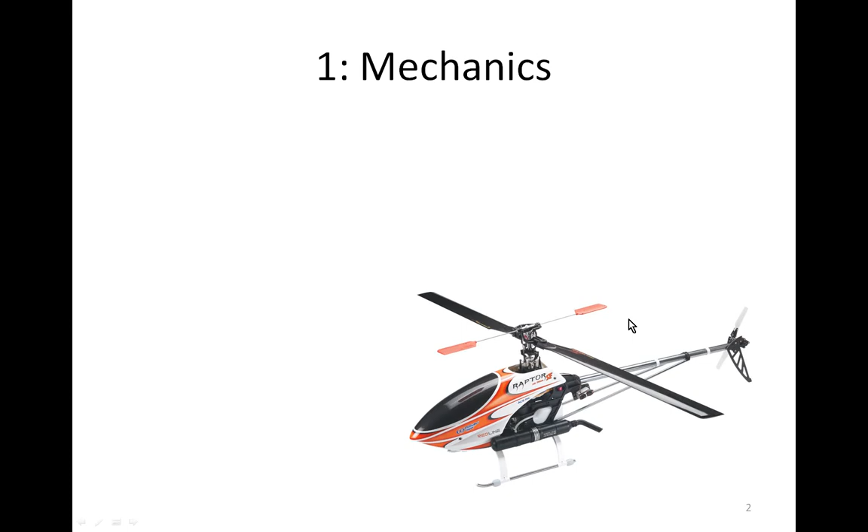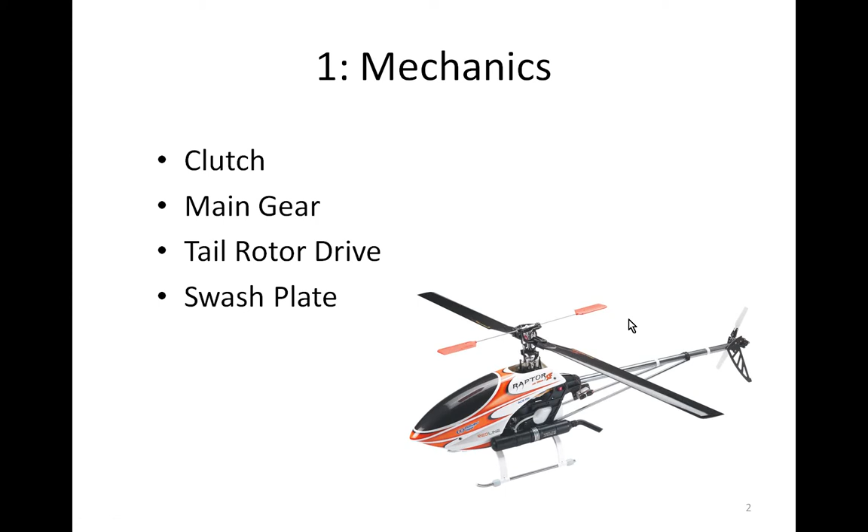First part is about mechanics. We will see the following components: the clutch, the main gear, the tail rotor drive, and the swash plate. The clutch. Here is a side view of an RC Heli. Clutch is here, between the engine, below, and the main gear, here.

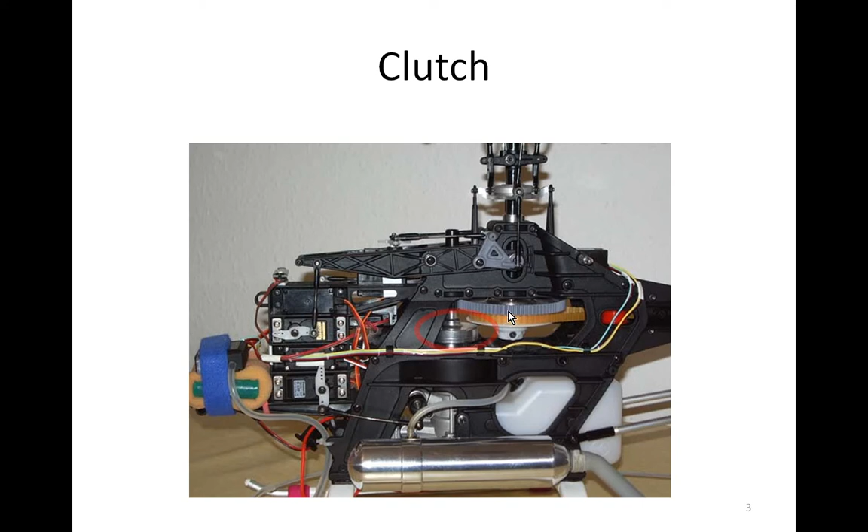The clutch allows to start the engine without driving the rotor. This is a safety component. It's a centrifugal clutch. So, main rotor is driven when engine accelerates, and main rotor is not driven when engine idles. So, we can move the Heli when the engine idles from the starting area to the takeoff area with safety.

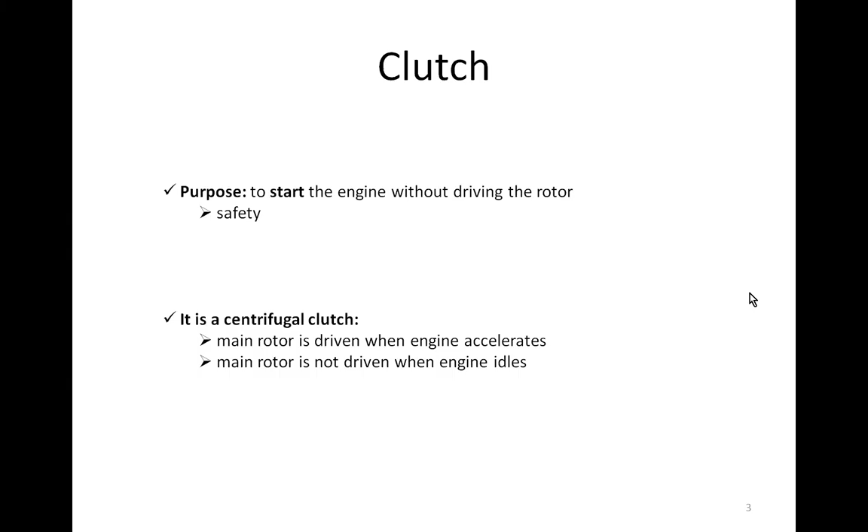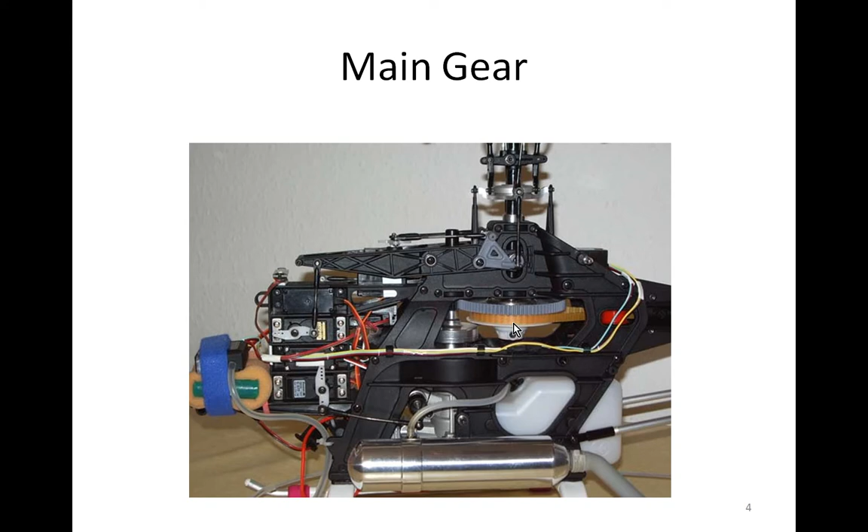One note: electric Helis don't have a clutch because electric motor can be stopped or run with the transmitter. Now the main gear. Main gear is here. This is a gray component here. It drives the main rotor. Below there is another smaller gear which drives the tail rotor.

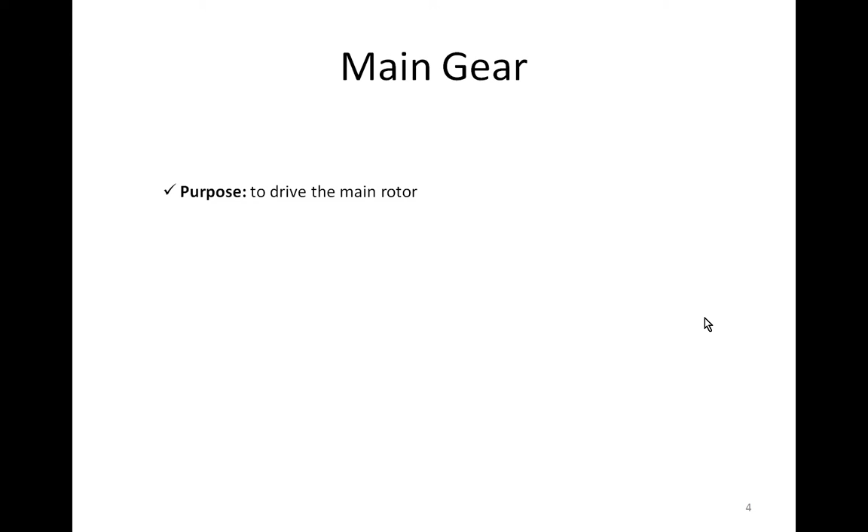Main gear drives the main rotor. A tail drive pulley is mounted just below. This assembly is mounted on a one-way bearing. Then, when the engine runs, it drives the rotor. When the engine idles or stops, the main rotor turns freely.

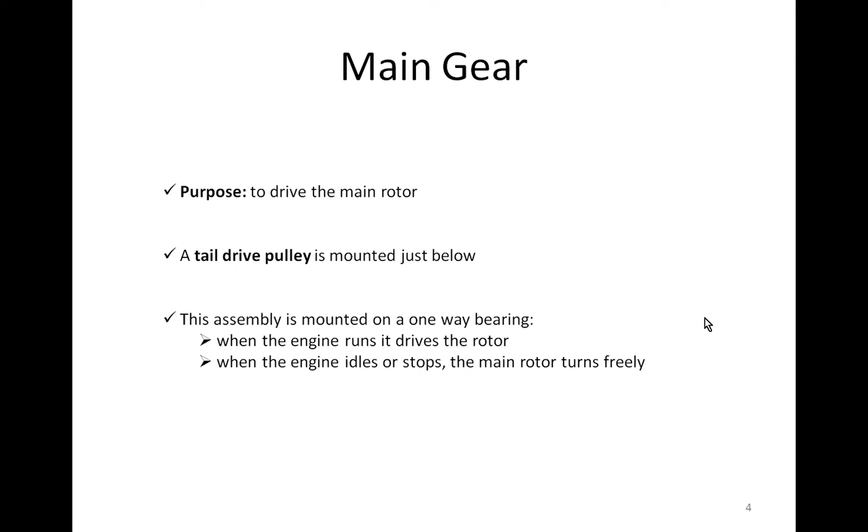It's like a bicycle, for example. When you pedal, you drive the wheel. If we stop pedaling, the wheel continues to turn. This is the same for the main gear.

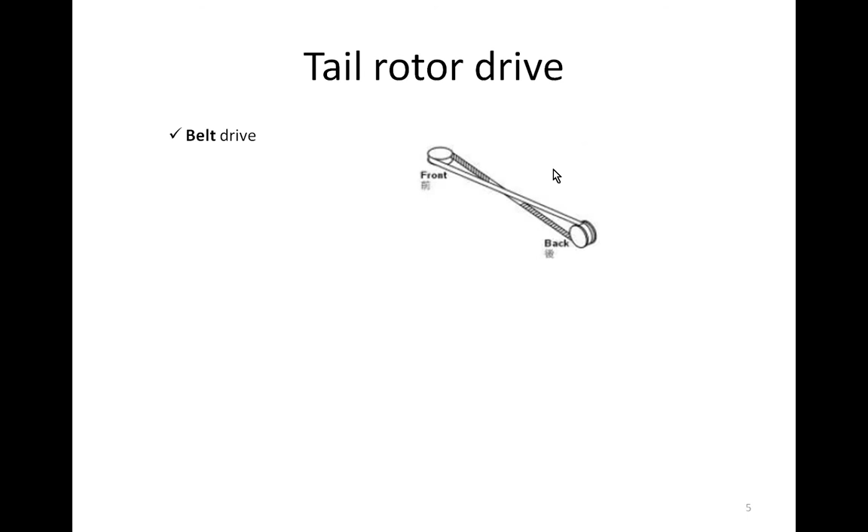Now let's talk about tail rotor drive. There are two ways to drive the tail rotor: the belt drive, where the belt goes through the tail boom, or the torque tube drive. Torque tube is inside the tail boom too. Here is a comparison about the two systems, with advantages and drawbacks for each system.

So, for the belt, advantages are: we have fewer mechanical parts, then it's inexpensive, and we have less damage in case of crash. Drawbacks are: we have a less accurate rudder than with the torque tube, and we need to regularly check the tension of the belt. For the torque tube, the advantages are: we have a precise rudder and we have no maintenance.

Drawbacks are: torque tube is more expensive and it's fragile in case of crash. In green here, it is the most popular system that we find now on the new helicopter kits. This is the torque tube.

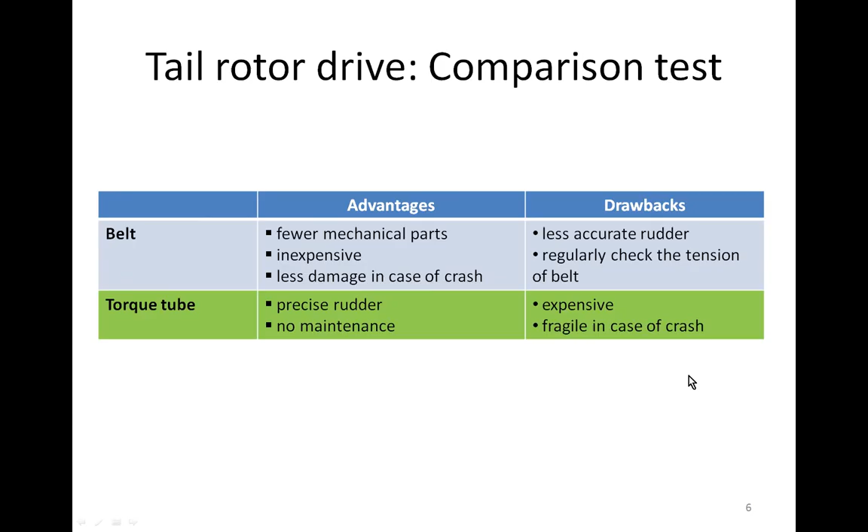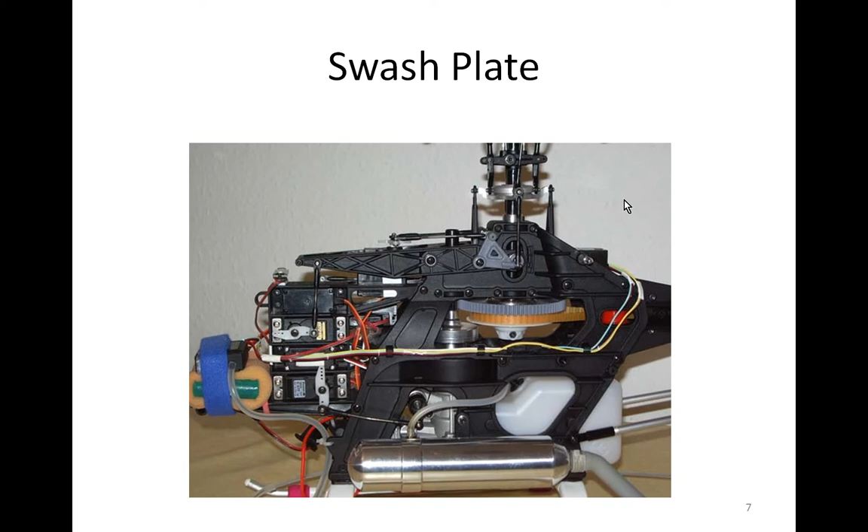The last component we are going to see now is the swash plate. The swash plate is located here. It controls the pitch of the main blades. Swash plate transmits orders to the main rotor. It can move up or down. This is the collective pitch control.

This control makes helicopter move up or down. Or the swash plate can tilt. This is a cyclic pitch control to tilt the helicopter. There are many swash plate types. Swash plate type defines the layout and the number of servos which operate the collective pitch function. Swash plate type may differ according to the model and the manufacturer.

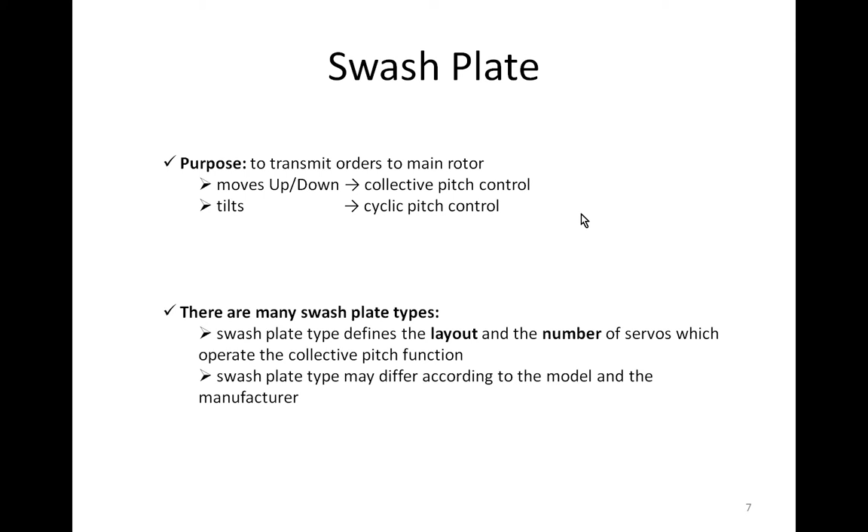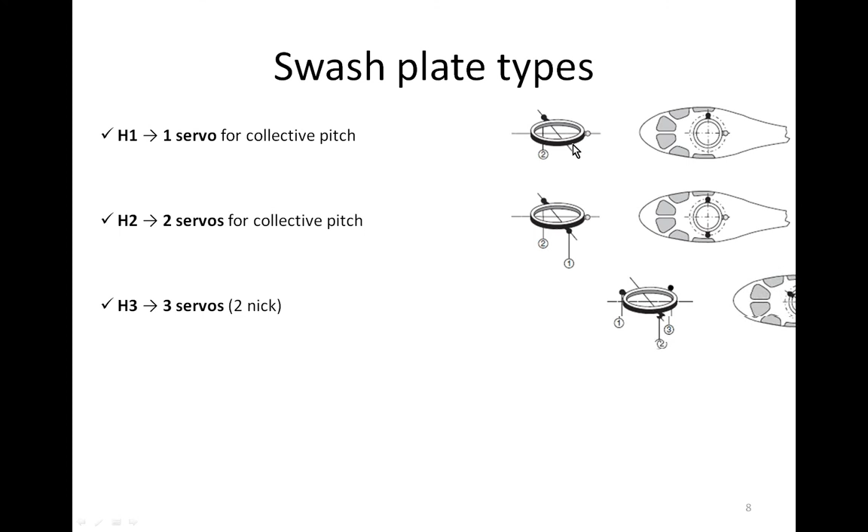Let's see swash plate types. Types are separated by the number of servos used to control the collective pitch. In other words, servos used to move up or down the swash plate. So we will see the different swash plate types. Here is the swash plate, and in black here are locations of servos which control collective pitch.

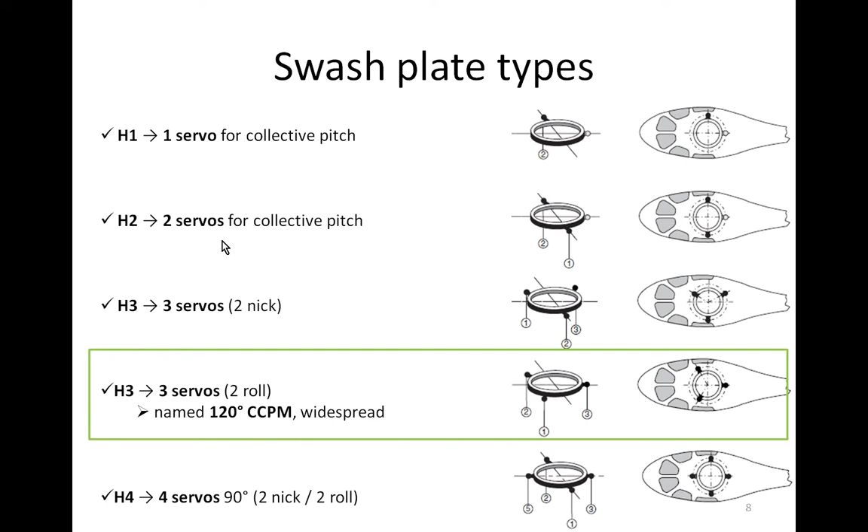The first type is H1 with one servo for collective pitch here. The H2 with two servos for collective pitch here and here. The first H3 with three servos, two on the nick, and another H3 with three servos, two on the roll, and the H4 with four servos at 90 degrees, two on the nick and two on the roll.

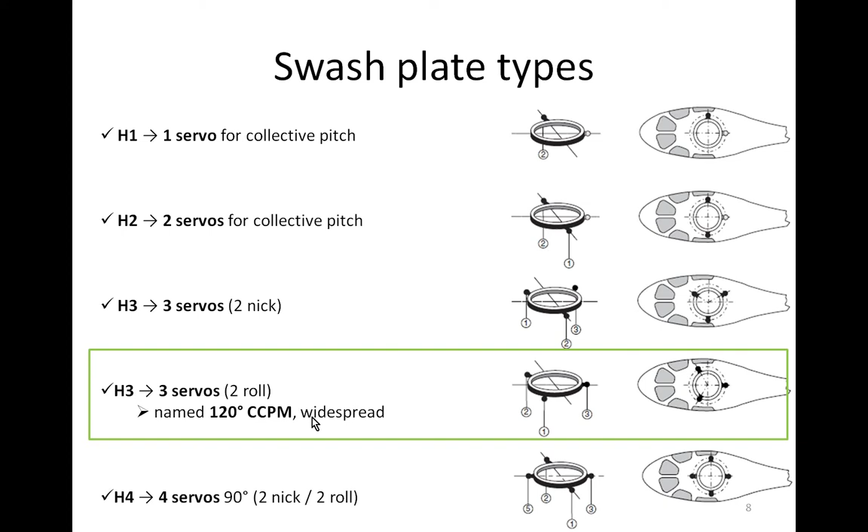Surrounded with green color is the most used swash plate type. This is the H3 with three servos and two on the roll. It is also named 120 degrees CCPM. CCPM means cyclic collective pitch mixing.

Now let's see a comparison test between the different swash plates. Let's start with the H1, one servo for the collective pitch. Advantages of the H1 is we have one servo per function, so setup is simple, and we don't need electronic mixing. In other words, we don't need a specific program in the radio to manage this swash plate.

Drawbacks are: servos have bigger load because servos work alone for each function. Also, if we have one faulty servo, we lose one function. So during the flight, if we lose a servo, we will lose one function: the nick, or the roll, or the pitch. Also, one drawback is mechanical mixing. We need mechanical mixing with this swash plate, so the heli mechanics is more complex.

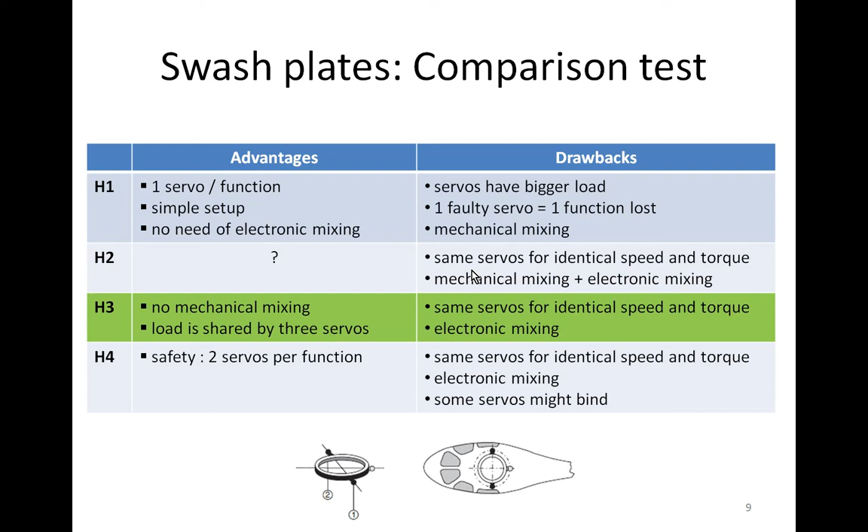Now let's see the H2. I didn't see advantages. For the drawbacks, we need same servos for identical speed and torque, because servos will work together. Also, we need a mechanical mixing plus an electronic mixing. Electronic mixing means we need to have a transmitter capable to manage H2 swash plate.

Now let's see H3 swash plate. Advantages are we don't need mechanical mixing, then the mechanics is simpler, and load is shared by 3 servos because they work together. Drawbacks are we need same servos for identical speed and torque because they work together, and we need an electronic mixing, so we must have a transmitter capable to manage the H3 swash plate.

Now the H4. The advantage for the H4 is the safety, because we have 2 servos per function. So if one servo is broken, we have another servo to manage the function. Drawbacks are we need same servos for identical speed and torque because all servos work together. We need an electronic mixing, so a transmitter with a program to manage the H4 swash plate.

And also the problem with H4 is that some servos might bind, because it is hard to put 4 points in the same plane. H3 is better for this reason: there is always a plane which contains the 3 points. The row in green is the most used swash plate type, H3 CCPM, because we can have a simpler mechanics, no need of a mechanical mixing, and almost all transmitters can manage CCPM swash plate.

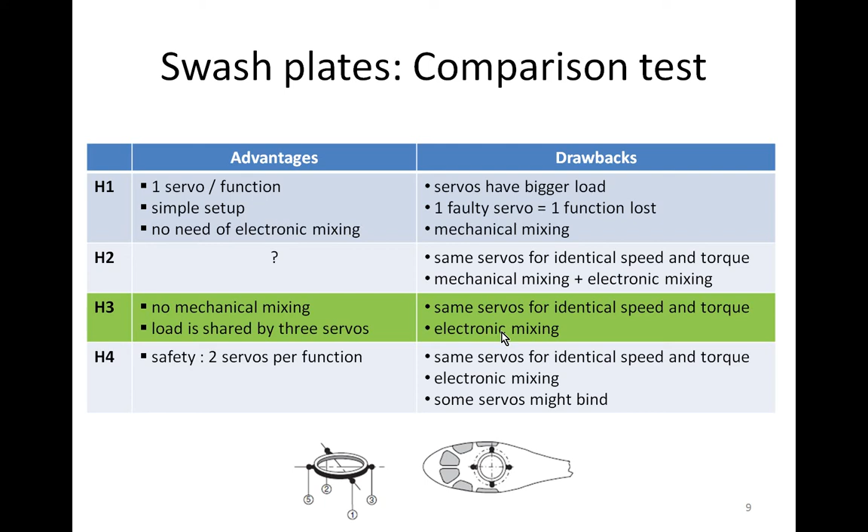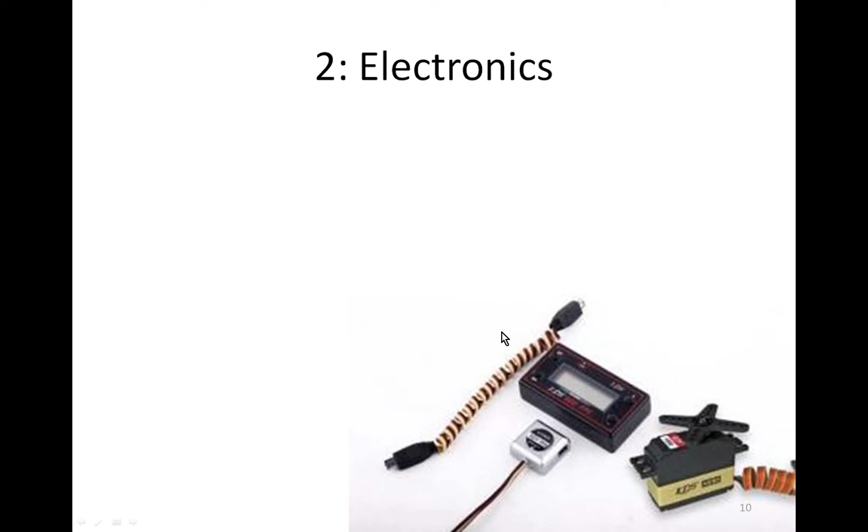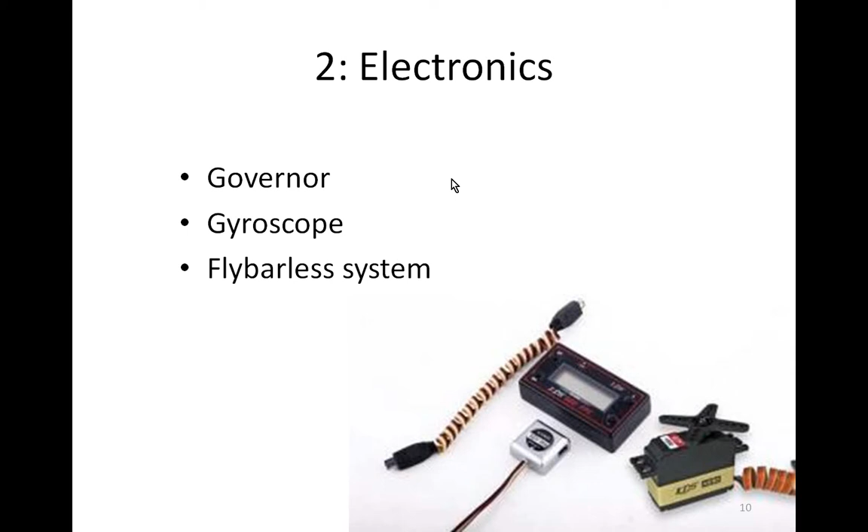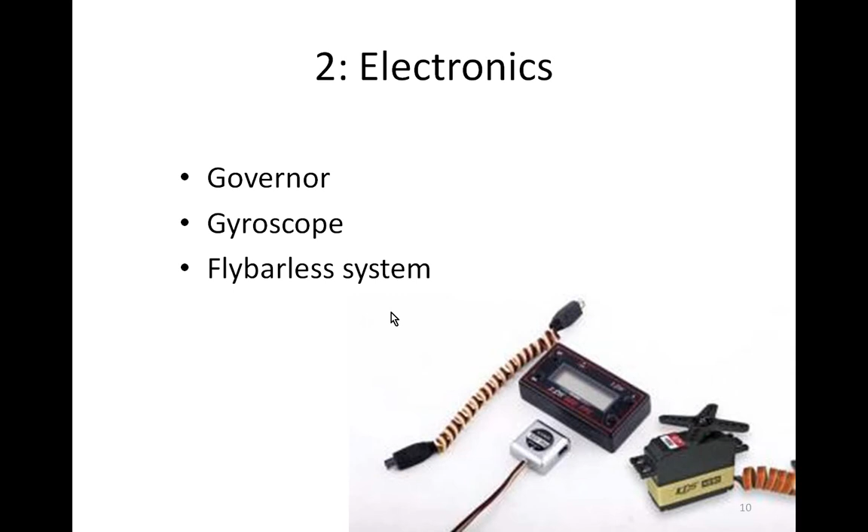Now we are going to talk about RC heli electronics. We will see governor, gyroscope, and flybarless system. Governor is not necessary to fly, but gyroscope is necessary. Flybarless is an evolution for electronic management of the rotor. Let's start with the governor.

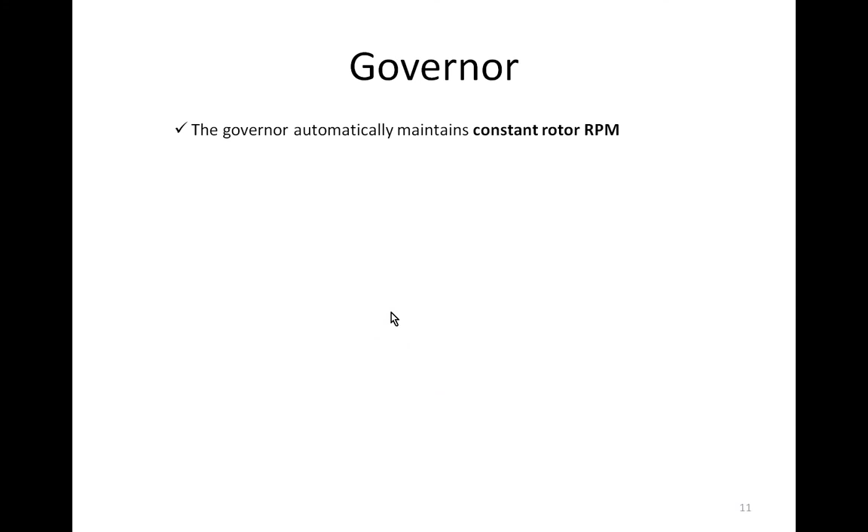When we modify pitch on the blades, load on the rotor changes, and then the rotor speed changes. To avoid this, we can use a governor. The governor will maintain a constant rotor RPM. How does it work? The sensor measures the engine speed, and the governor controls the throttle servo. And on some helis, the governor can also control the mixture.

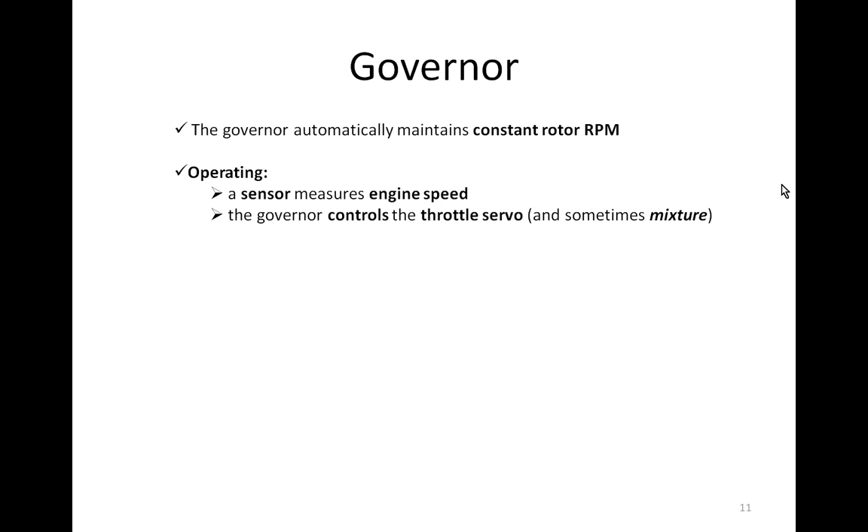For example, the pilot can set a value, for example 2000 RPM for the rotor speed, and also we have the throttle input. This input is to control the throttle servo when the governor is disabled, for example when we start the engine or when we take off the heli.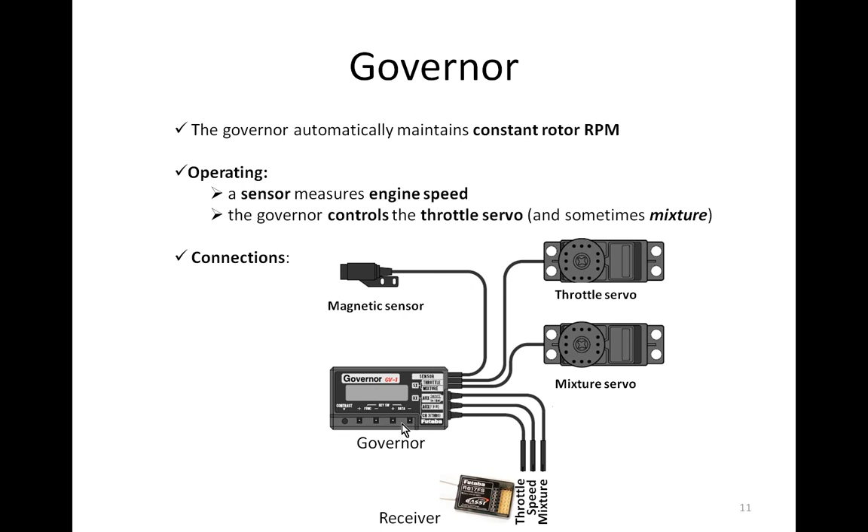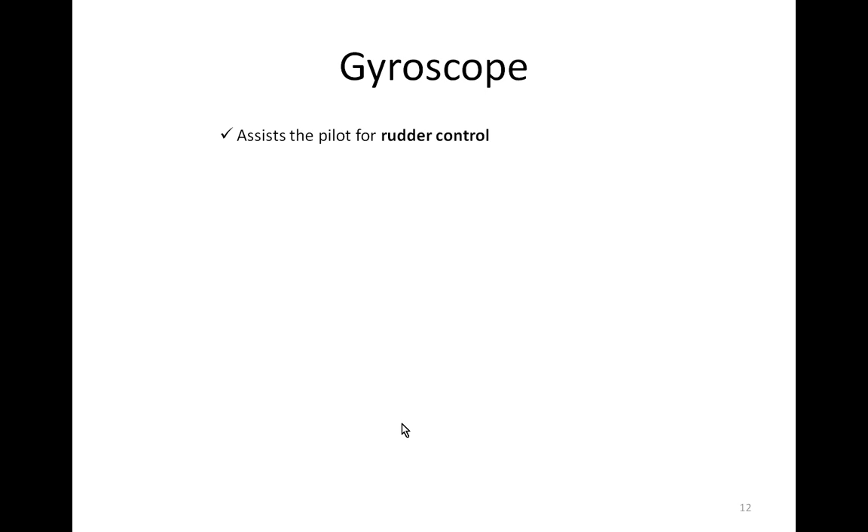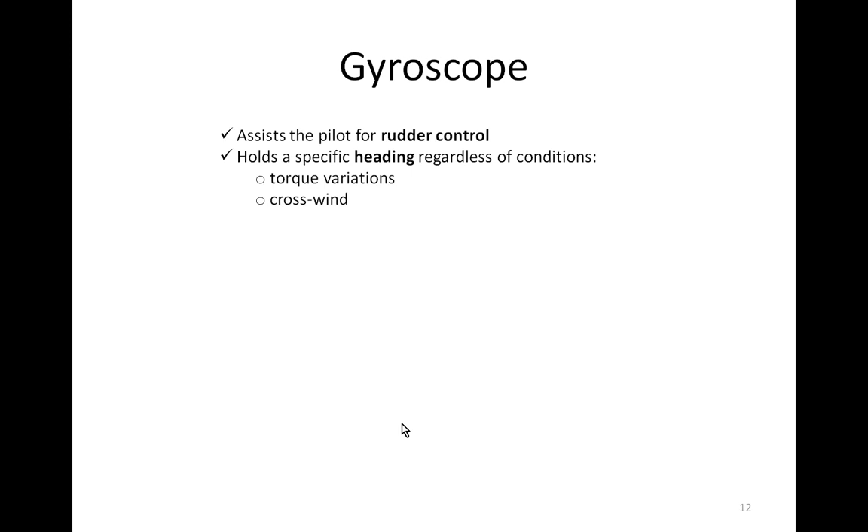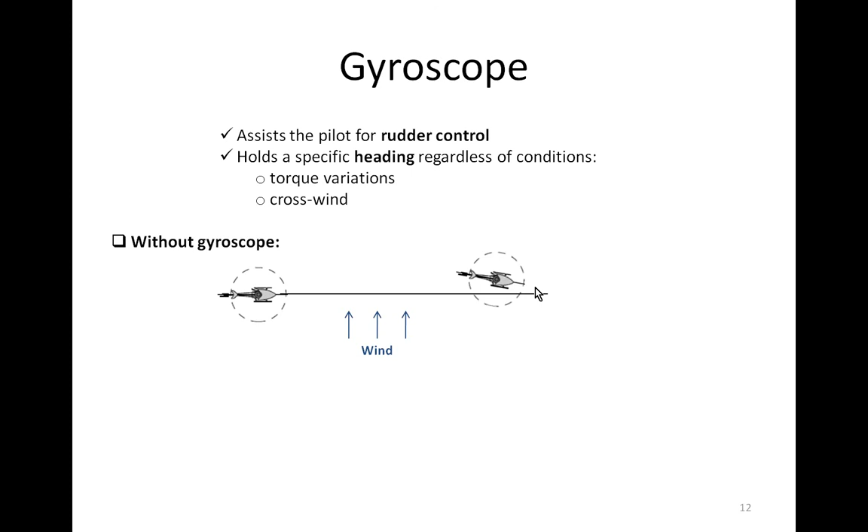Now, let's see the gyroscope. The gyroscope assists the pilot for rudder control. Also, it holds a specific heading regardless of conditions, torque variations and crosswind. Let's see an example. Without gyroscope, the heli is moving forward with crosswind. Then the helicopter is pushed by the wind. Also, the nose of the heli goes against the wind. This is the weathervane effect.

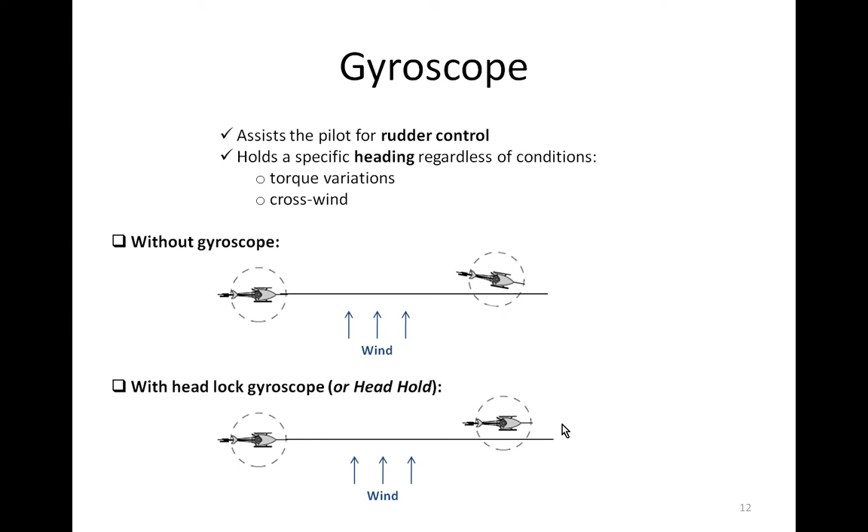With a head lock gyroscope, or head hold, in the same configuration, the helicopter is moving forward and there is crosswind. The helicopter is only pushed by the wind, but it keeps the same heading. The gyroscope manages this.

Let's see the gyroscope operating. We have two cases. First case, the gyroscope compensates for unexpected tail drift. When the gyroscope detects tail drifting and there is no order from the pilot, the gyroscope generates a control signal to maintain the head in the same direction. So it controls the rudder servo to keep the heading constant.

The other case is when the pilot sends an order to the rudder. The pilot uses the transmitter and sends an order to the receiver, the order comes to the gyroscope, and the gyroscope simply transmits the order to the rudder servo.

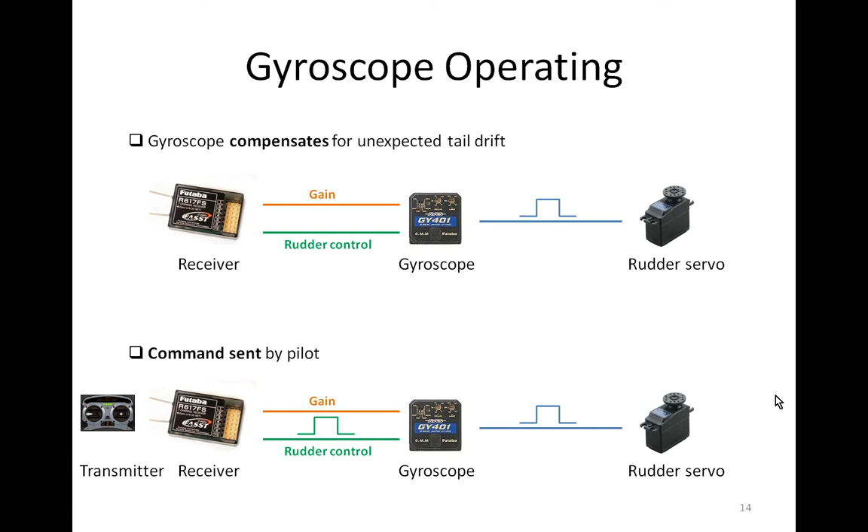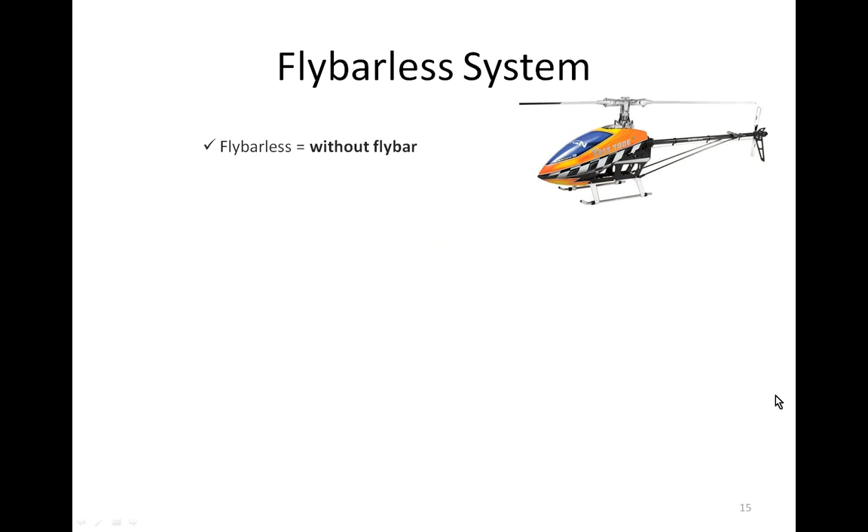So, the rotor has no flybar. Rotor is controlled by electronics. Flybarless system is a 3-axis gyroscope, so it controls all functions except throttle. Okay, it will control the nick, the roll and the pitch. And also, we don't need the gyroscope seen previously anymore, because the flybarless system will also control the rudder.

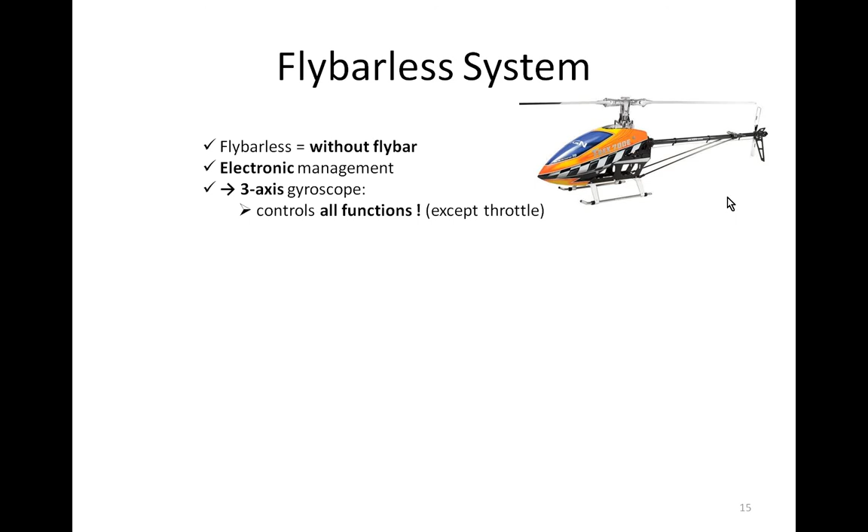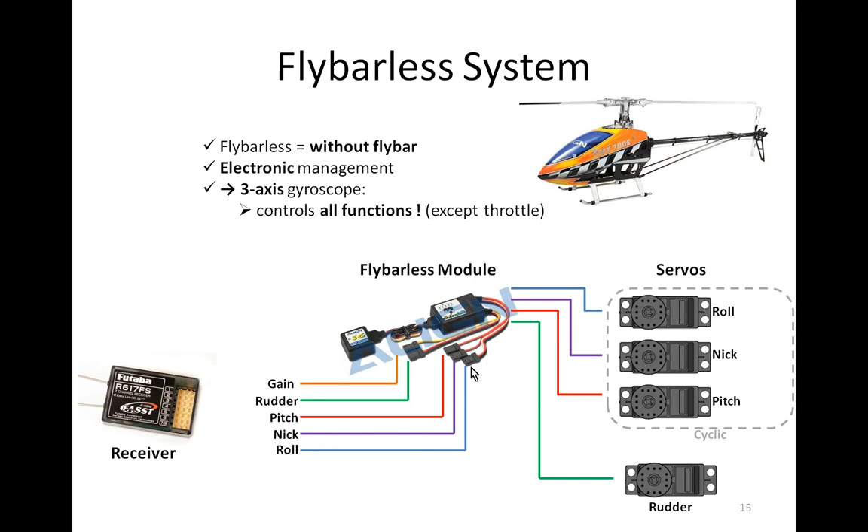Now we will see a comparison test between the two rotors. First, the flybar one. The advantages of the flybar is it's inexpensive and setup is simple. Drawbacks are the mechanics is more complex. We just saw that. It is less precise than the flybarless system. We have more drag, it's heavier, and it's fragile in case of crash.

Now the flybarless system. The advantages. It's more precise. We have fewer mechanical parts, so we have less drag and lightweight. Also, we have less damage in case of crash. And it's more aesthetical because we have no flybar. Drawbacks are we need digital servos for speed.

We have more electricity consumption because it's managed by electronics and we control directly the main blades and not the flybar, so it's more expensive in current. It's more expensive also, and we have a more complex setup. So the flybarless is highlighted in green because it becomes a trend on the new helis.

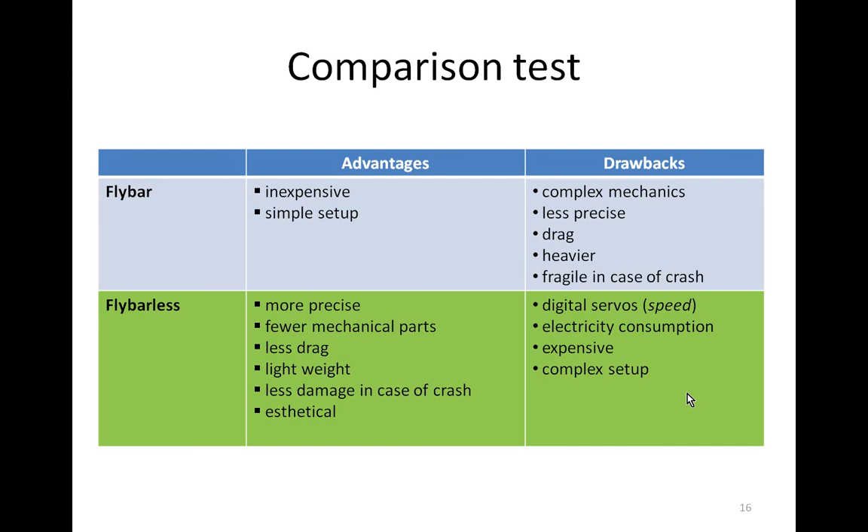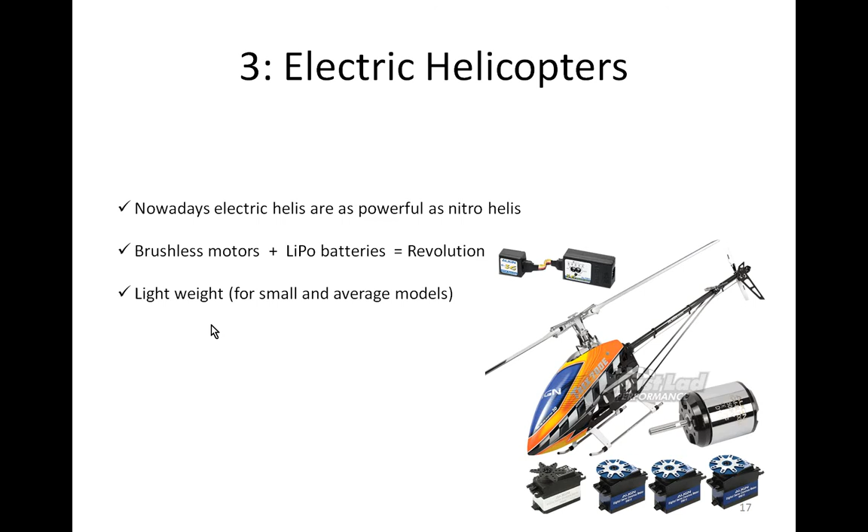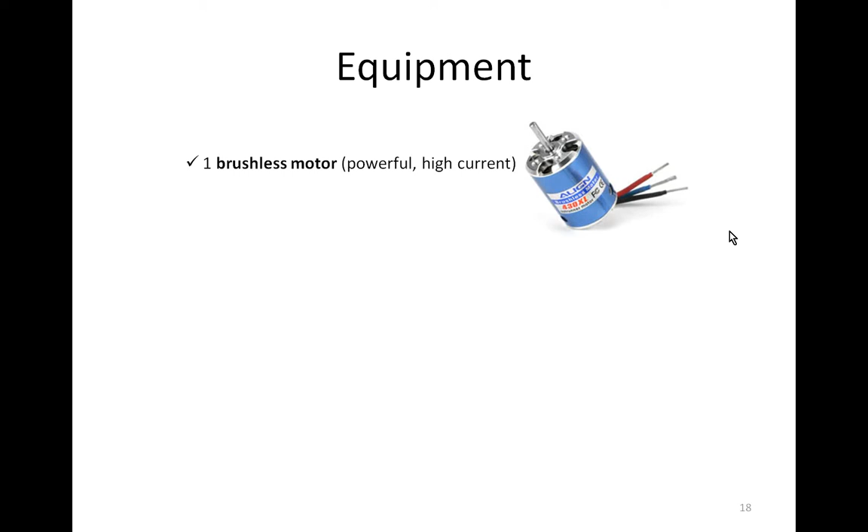Now let's see the equipment needed for an electric heli. We need one brushless motor, a powerful motor that can accept high current. We need one electronic speed controller which can accept high current too, and most of speed controllers have a built-in governor mode feature. Also, we need LiPo batteries with high discharge current.

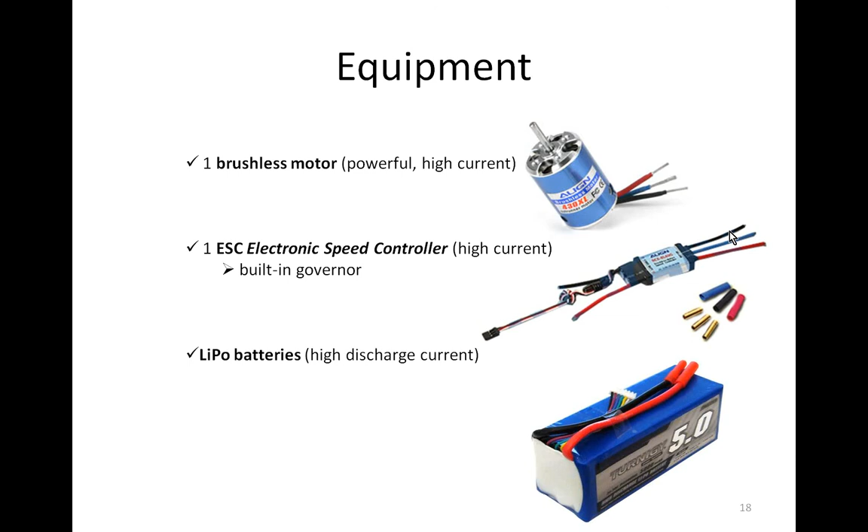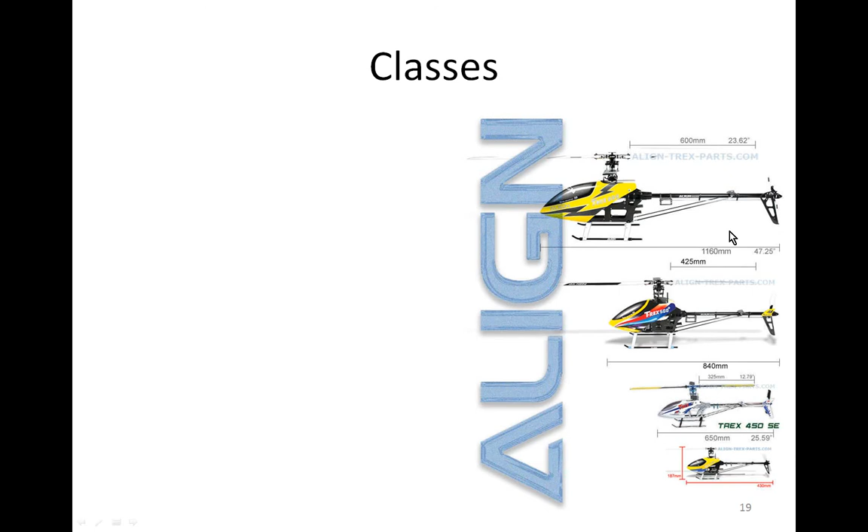Classes. For electric helicopters, we have many classes depending on the size of the heli. So, we have the 700 class for 700 mm blades length. It corresponds to the 90 size nitro model. We have the 600 class with 600 mm blades length. It's equal to 50 size nitro model.

And we have the 550 class with 550 mm blades. It's the same as the 30 size nitro model. And for the following classes, we will see that the number of the class doesn't match with the length of the blade. So the 500 class have 425 mm blades, the 450 class have 325 mm blades, and the 250 class have 205 mm blades. There are also some smaller classes, like the 100 for example.